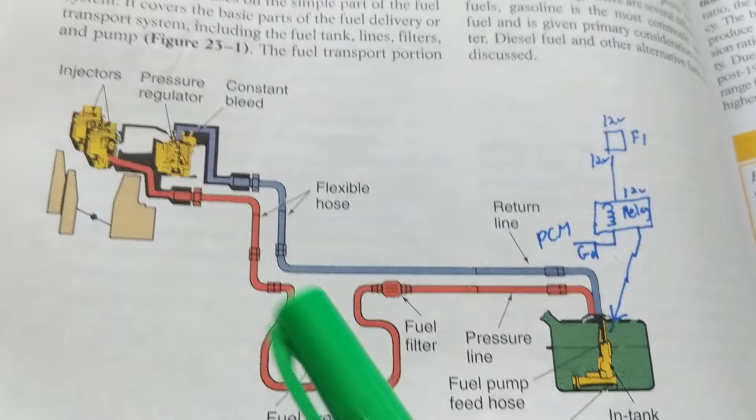We all know from the fuel tank, the fuel is delivered to the components called the fuel injectors, which are all the way in the front of the car. The fuel pump itself is in a fuel tank, as you can see. It's an electric fuel pump. I think this pictorial describes it pretty good. That's why I chose this. So, a couple of components involved, but I wanted to stress the electrical part of it.

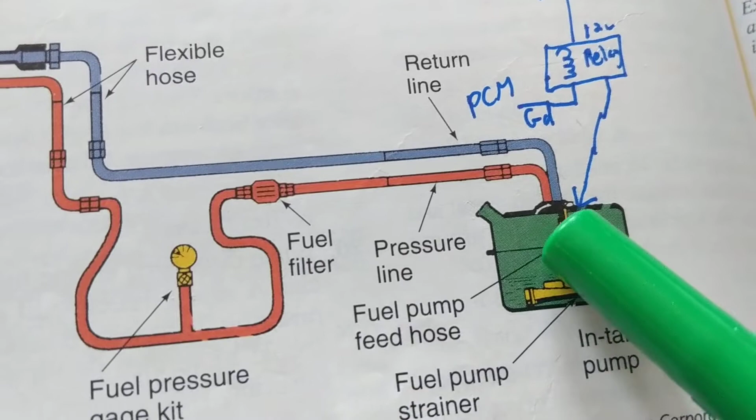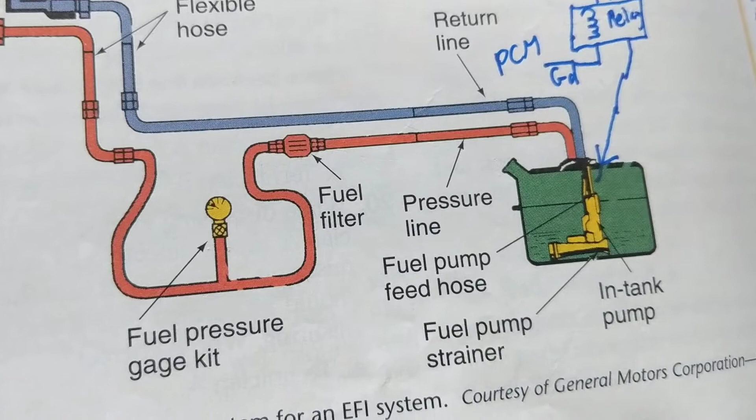Over here, in the tank itself, we have the electrical fuel pump. Now, as a result of that, we have fuel pressure. Fuel will be delivered through something called a fuel filter. Obviously, anything that goes into the engine cannot have any contaminants or dirt. So we have to avoid that. In order to do that, we have a fuel filter, just like you have an air filter. So air and fuel which goes into the engine has to be clean.

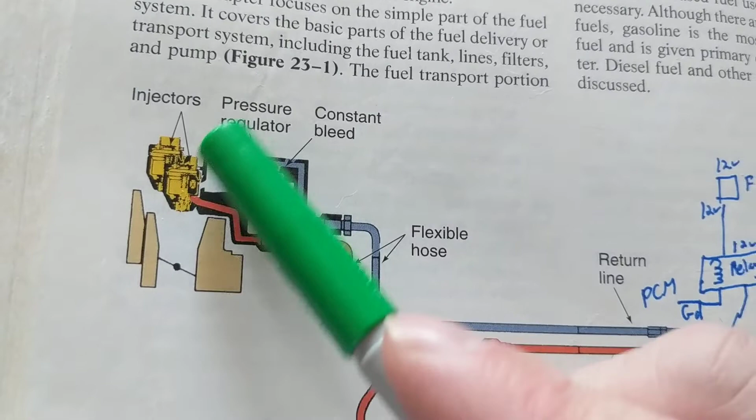Now we have something called a fuel pressure gauge kit. So if you want to measure fuel pressure, you need a gauge to measure it correctly. Remember, this is fuel pressure, not voltage. Then it goes to the proper fuel injectors. If you have a V6 or V8, 8 injectors, 6 injectors, they spray this mist with the proper fuel into each cylinder. Then there's a return line going back to the fuel tank.

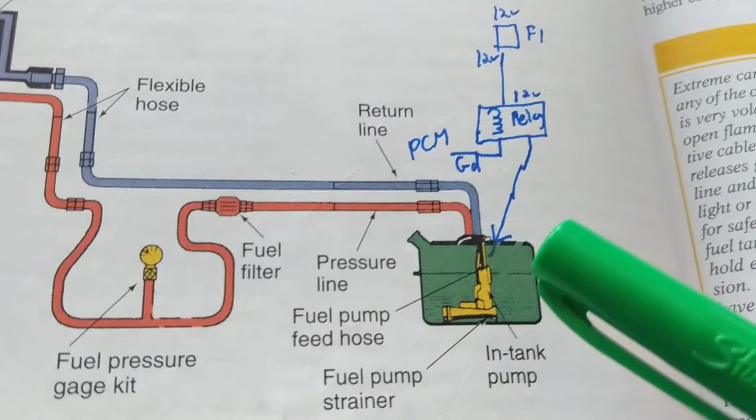So we're going to stress one thing. A couple of things are missing. In another video, I'll stress these other components like the fuel pressure regulator and all these things a little more. But now I want to delve into the electrical part of it so you understand better. Whenever you hear the word electric fan, electric motor, think of one thing: a voltage. It needs a voltage. Electric fuel pump means, as soon as you hear the word electric, it needs a voltage.

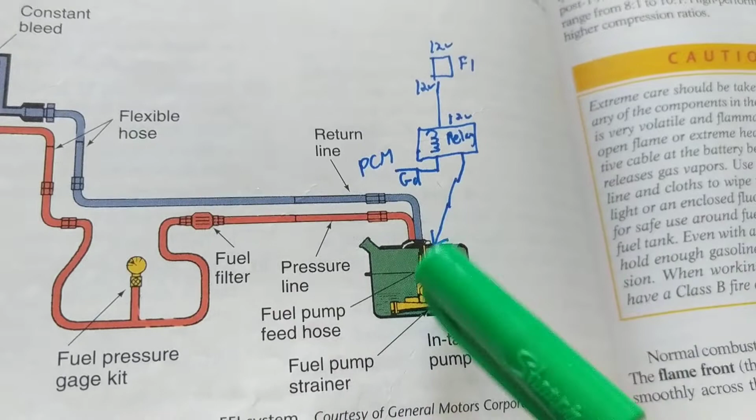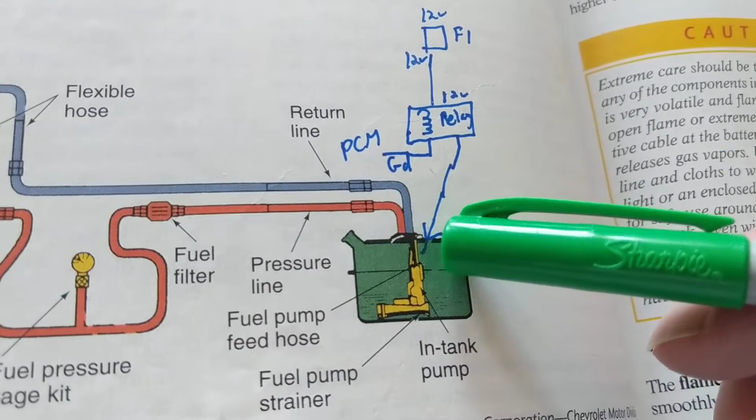What's missing in this diagram, this is just pointing out the actual fuel delivery. Okay? The electric part of it is not here, so I had to draw it in. Now, we need 12 volts to go to the fuel pump. In the olden days, there was a mechanical fuel pump, and the fuel pump was external on the outside. Now, it's in the tank itself, which is a hard place to get to, obviously.

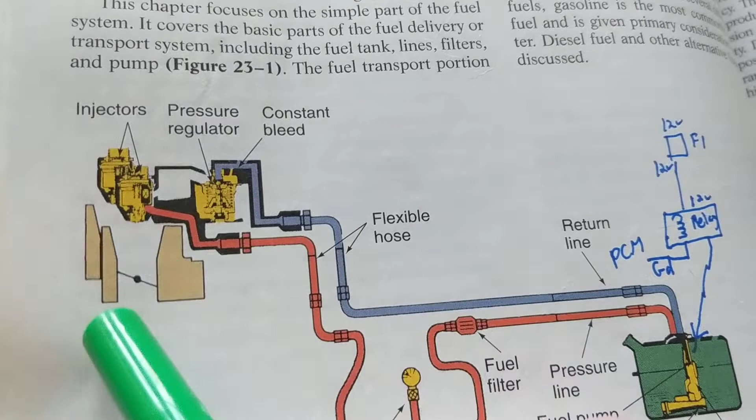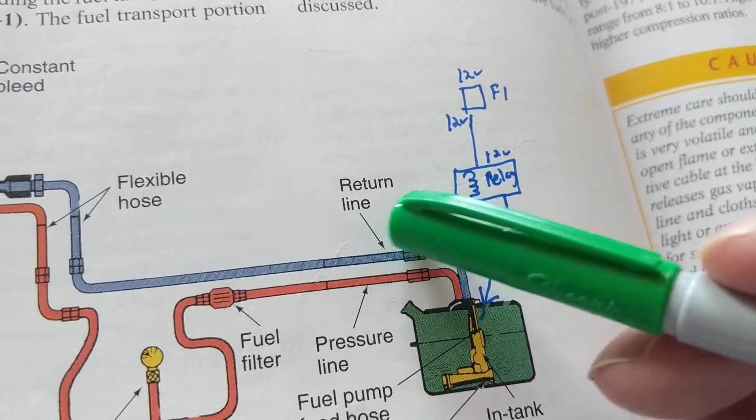So as far as diagnostics, if you have a crank and no start, it's hard to get to this point to diagnose. What you want to do is go to the front. The front, where the fuses and relays are, is the most accessible. That's why in every video I always say try to stay within that area. That doesn't mean that the problem is not the fuel pump itself, but we go to the areas that are the easiest to go to. Now, this fuse, this relay, this computer, which we'll discuss, is in the front, under the hood. But for demonstration purposes, I drew it over here.

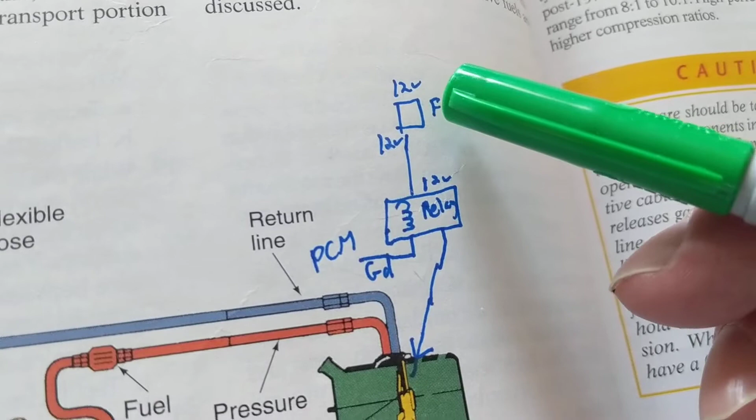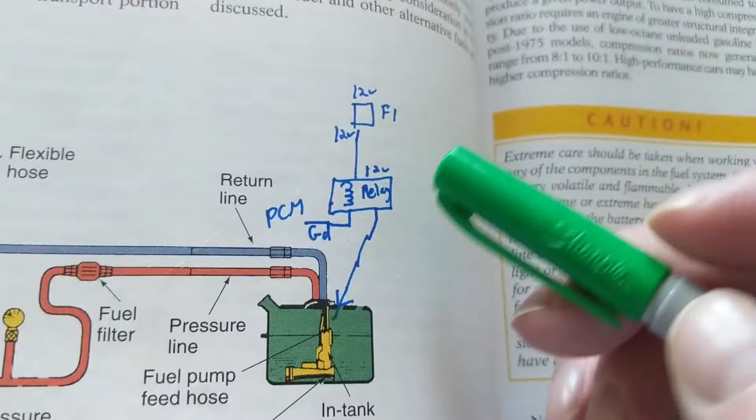Now, as we said, we need 12 volts. We go through a fuse, let's say. One side of the fuse, the fuel pump relay fuse, will be 12 volts. The other one is 12 volts also. Before the relay, we have 12 volts through a wire. Now we have something called the relay. The relay sometimes needs the PCM, which is the main computer, to give the coil side, the control side, a ground.

So one side of the coil has 12 volts, the other side has a ground coming from the PCM when the PCM decides to give it a ground. That will activate the relay. That will give 12 volts on the load side, which I didn't draw, to the electric pump, which we need 12 volts to.

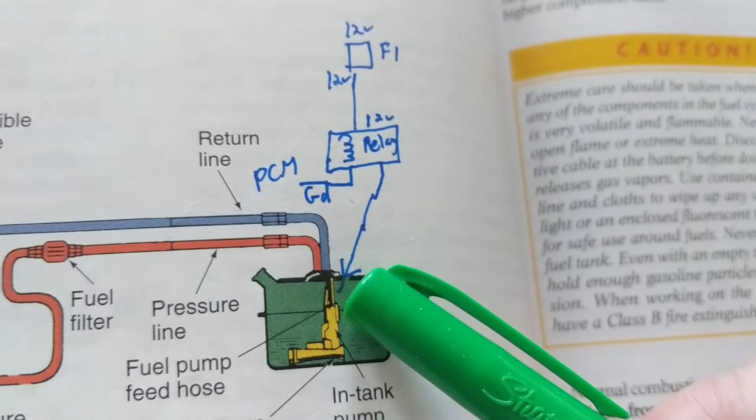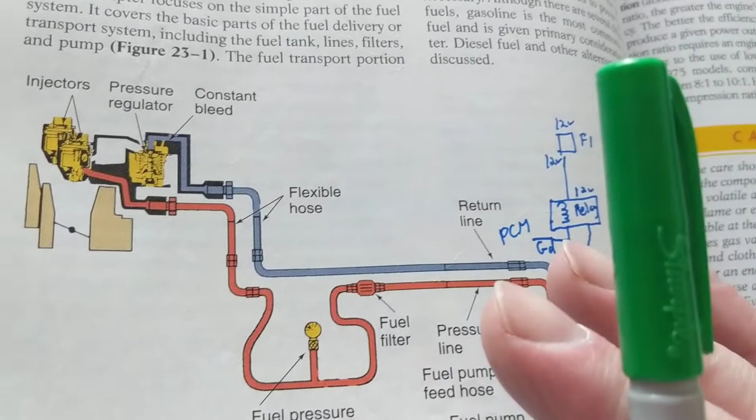Now, there's a problem. Let's say you have a crank and no start. Do you measure fuel pressure with the fuel pressure gauge? I know many people don't have fuel pressure gauges, and number two, even if you have it, where are you going to put it? You may not have a Schrader valve, which is a valve specific to put the fuel pressure gauge. So are you going to measure fuel pressure or voltage? Remember, the car doesn't start. Which comes first? Do I need the voltage to give me the fuel pressure, or do I need the fuel pressure to give me the voltage?

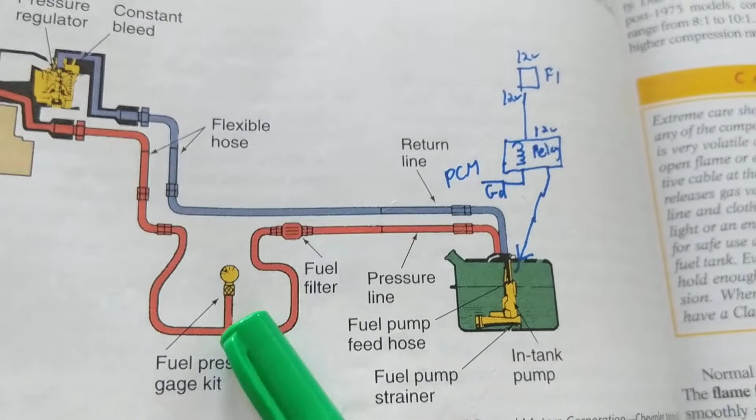So which comes first? So let's say there's a fuel pressure gauge, just like the gauge in your car for the temperature, for fuel, for anything. Okay, that's called a gauge. Now, first of all, how much pressure is needed? Depends on the system, depends on the car, depends on the fuel injection.

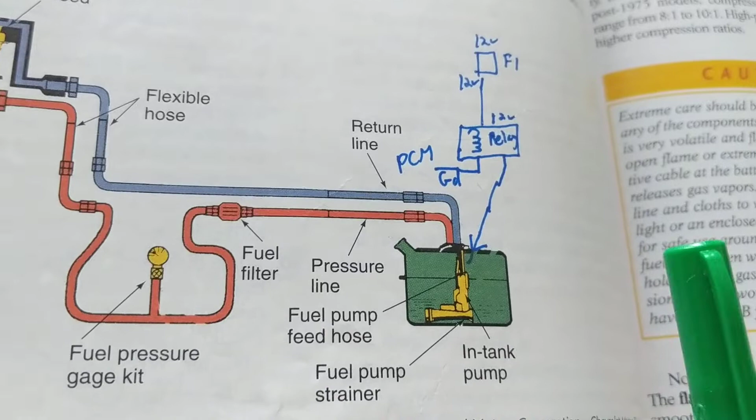Do you need 20 psi? Do you need 30? Do you need 40, 50? 50 psi is a good number. 55 psi is a good number. Some go as high as 60 psi. So, number one. Number two, if you are using a fuel pressure gauge, make sure the pressure stays. It holds pressure. It does not drop from 50 and then go down slowly over a couple of seconds, from 50 to 48, 47, 46. You want it to hold pressure.

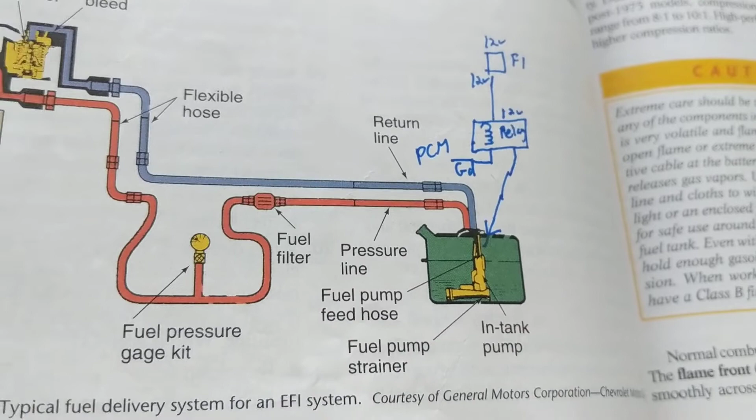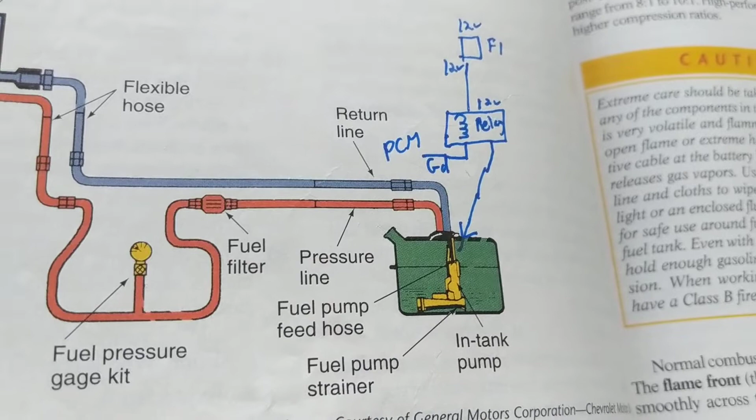What do we mean by that? Let's say you have a tire filled with air. Over time, it loses air. Why? Because there's a leak. Maybe in the valve stem, maybe in the tire itself, on the nail, right? You will lose tire pressure. How do you know? There's two ways of looking at your tire. Visually, or there's a tire pressure monitoring system that tells you that you have low tire pressure. So either visual or electronic.

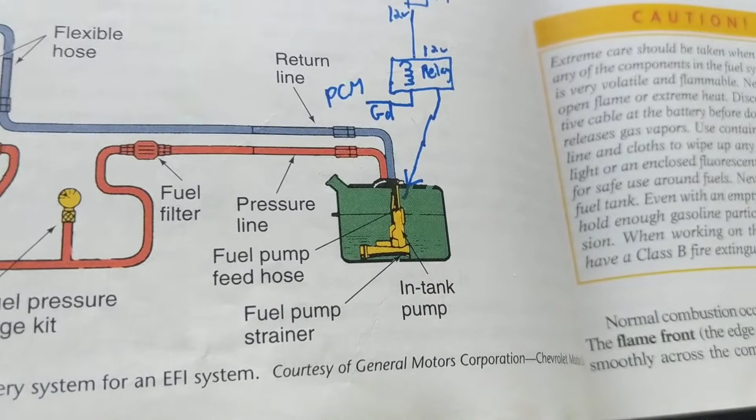If you put air into that tire and you see that it's underinflated and it doesn't take the air that you're putting in, guess what? You know you have a bad leak. Can we see a fuel pump visually? No, that's the problem. We have an electric fuel pump. We can't determine if it's bad visually. That's why the electronics is the challenge of how to diagnose a bad fuel pump. And it's a costly venture, obviously.

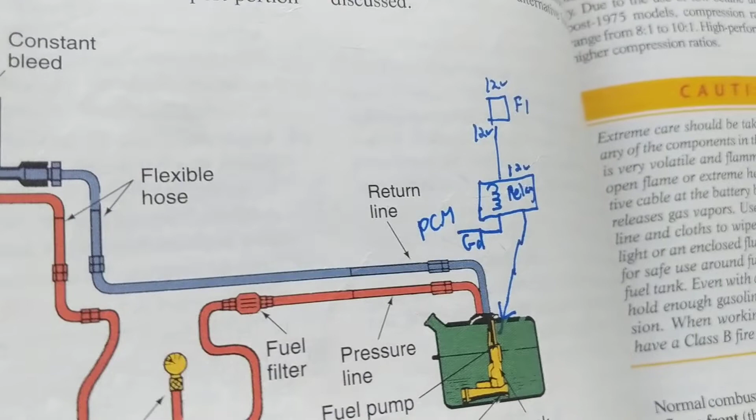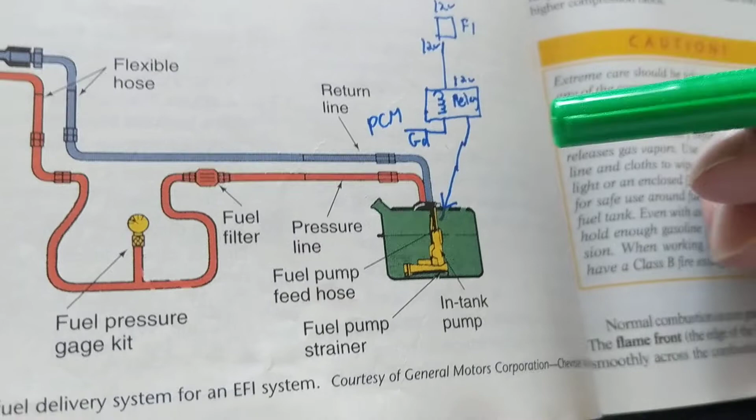You have to go to the fuel tank, which is probably full of fuel when it happens. It is labor and it is parts. If the labor is 120 an hour and it's a 2-hour job, that's $240 just for labor. Forget about the parts. So again, in our example, the tire does not hold pressure because you keep putting air in it and it does not hold air. It's a bad leak, and that was easy to see visually. This is not visual. I cannot go inside the tank and look. So electronically, I have to measure it.

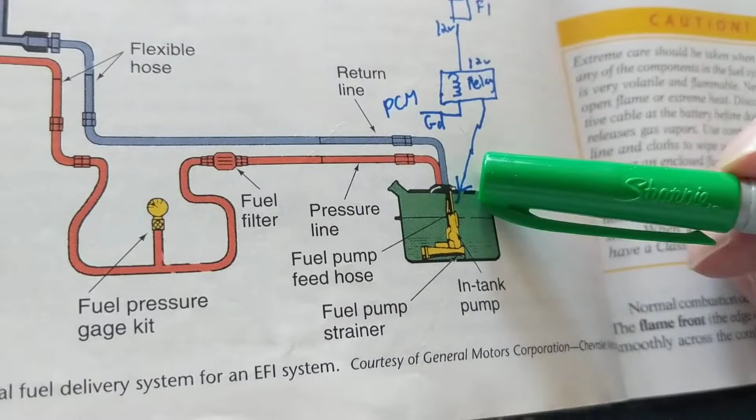Like we said before, do I measure fuel pressure? Do I measure voltage? Let's say the fuel pressure is 0 psi when I put a pressure gauge on. What's my next step? My next step is the voltage. I need 12 volts for this to give me fuel pressure. If I do not have 12 volts, I have no fuel pressure. I cannot deliver the fuel. So which comes first? The voltage comes first. But which do I test first?

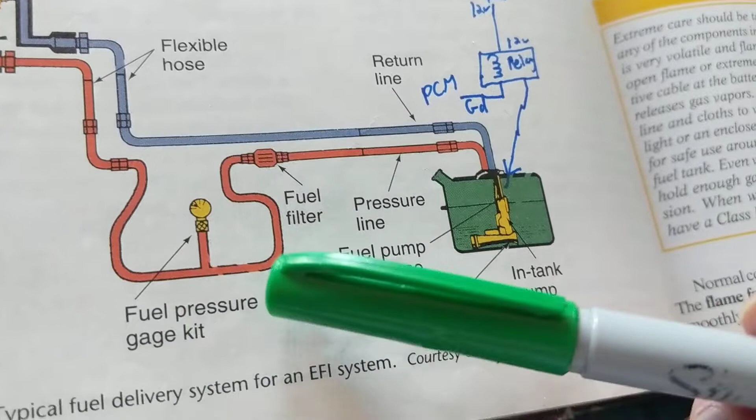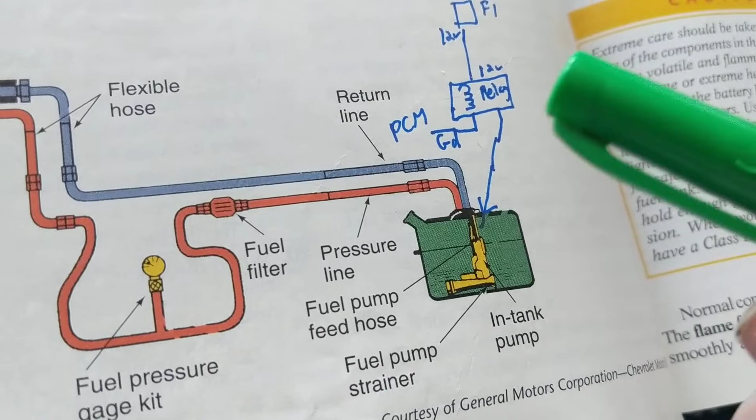If you're able to use a fuel pressure gauge, this is the best test. Make sure you have fuel pressure and make sure you hold fuel pressure, just like the tire example. If you need 32 psi in your tire, make sure it holds 32 psi. Now, what are we left with? The fuse, the relay. One more thing I had to draw in: what activates the relay to give 12 volts to the electric fuel pump? The PCM, the main computer, giving it a ground on this side. We need 12 volts here and ground over here. The PCM gives it a ground. Now we have 12 volts.

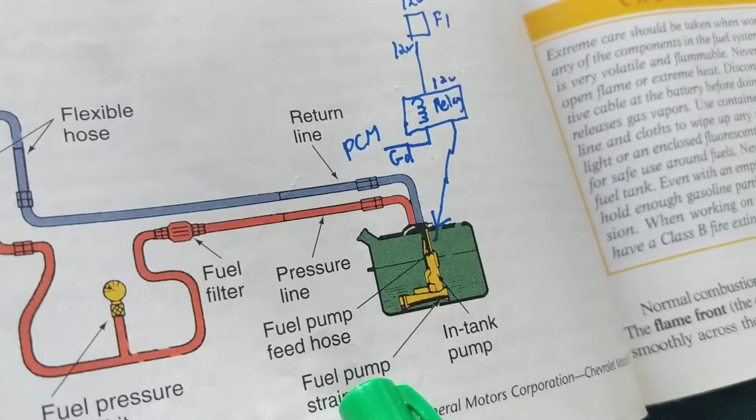Okay, so basically they all work the same way. It doesn't matter if the PCM gives a ground or if it has a physical ground. It doesn't matter if it's Asian cars, domestic cars, European cars. They all have to work the same way. There could be one relay. There could be two relays, like we had in, I believe it was, Hondas. There could be 3 relays. You never know until you look at the wiring diagram.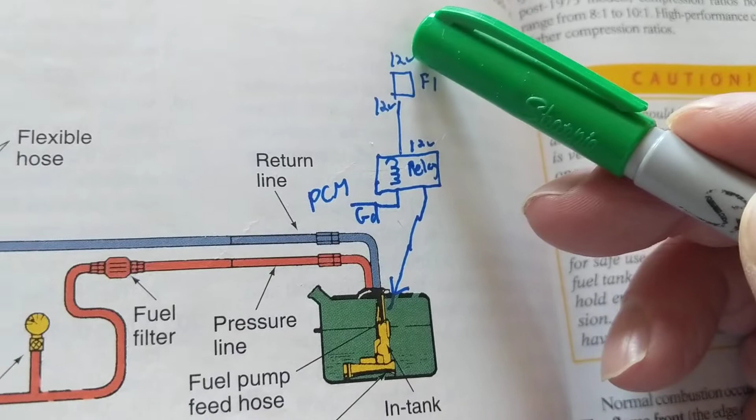Now, diagnosing. I go to the fuse. I know I have a crank and no start, right? I go to the fuse, I measure 12 volts here, and I measure 12 volts over here. Does that mean I will have fuel pressure? Absolutely not.

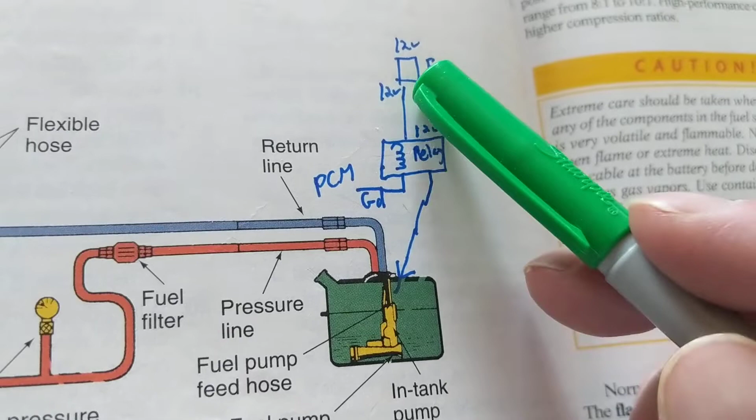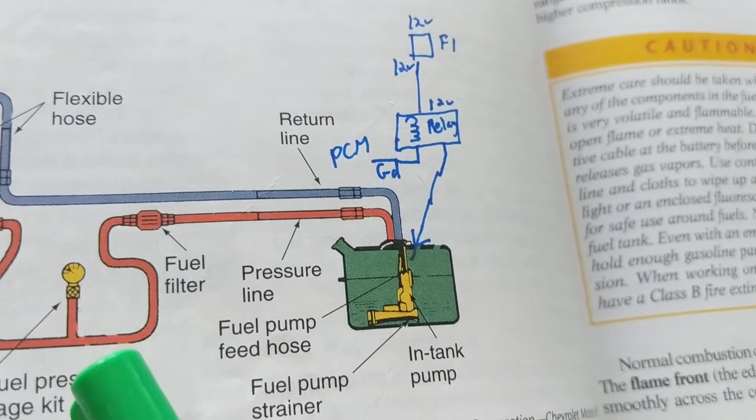Absolutely not. Right? We still have this involved. Okay? Let's say you don't have a fuel pressure gauge. You don't know where to put it, and you don't have it. So we'll start from the voltage, like I just said. I got 12 volts here, 12 volts here. Does that mean that I have fuel pressure? Not necessarily. We're still left with this.

I come to the relay, this side of the relay. I have 12 volts at the relay. Does that mean that I have fuel pressure? Not necessarily. I go to the other side of the relay, not the coil side, the load side. And I measure 12 volts over here. So I say to myself, okay, fuse is good, this wire is good.

What else? The main point to stress. If I have 12 volts coming out of the relay, what does that mean? The PCM gave it a ground. That means the computer is good. That means the coil side, this is the coil side, is also good. Why? Because it's been activated. Because I had 12 volts on the other side. That's a good thing. That shows me at least the computer is working. That shows me the relay is working.

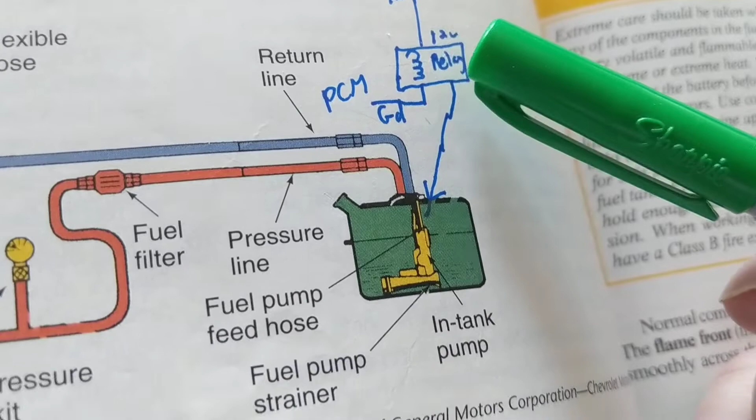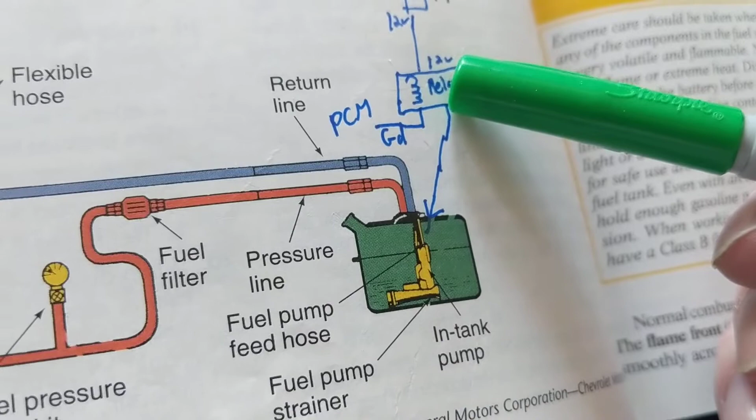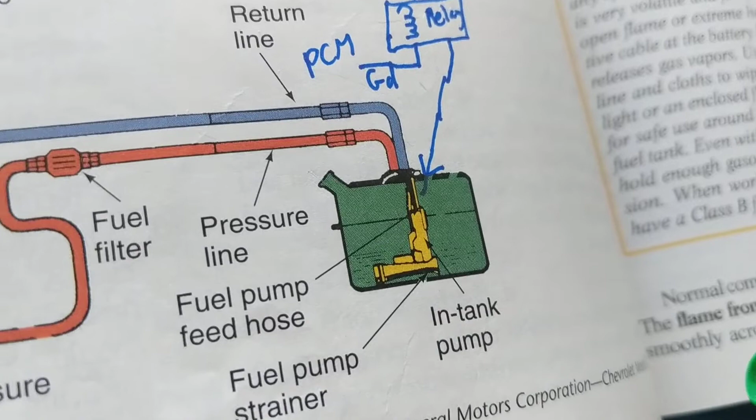Will I have fuel pressure? Not necessarily. And you're going to say, but why don't I have fuel pressure? You just told me if I have 12 volts going here, that's a good sign, right? Let's say you just went to the gas station, went to BP, you filled up your tank with $40 worth of regular, right? Then you crank, the car doesn't start, but I just filled up with gas, right? It doesn't matter if you put in super, premium, 93, 91, regular.

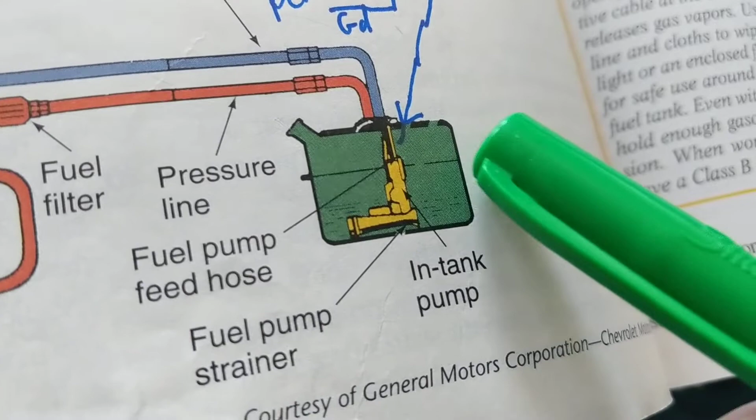It doesn't matter. The amount of gas that you have in the tank, just because you filled it up, does not mean necessarily that the fuel pump will start. You need 12 volts and you need pressure. The fact that you just filled it up is nice. BP will tell you you're a good customer. Thank you for your service. But your car won't start. But if you are empty, obviously, then it will have an impact. So, 12 volts over here. I had 12 volts at the relay.

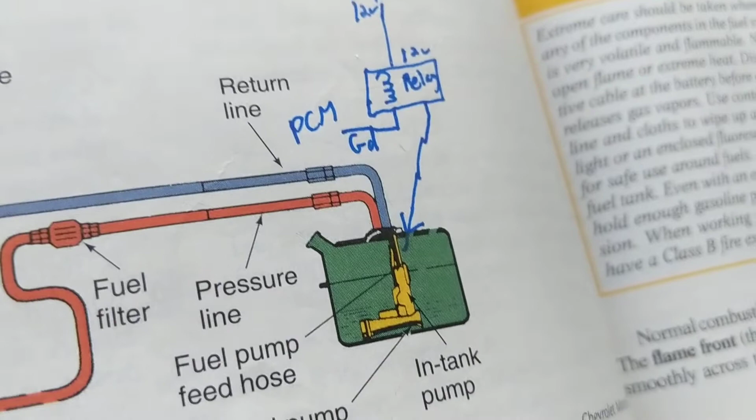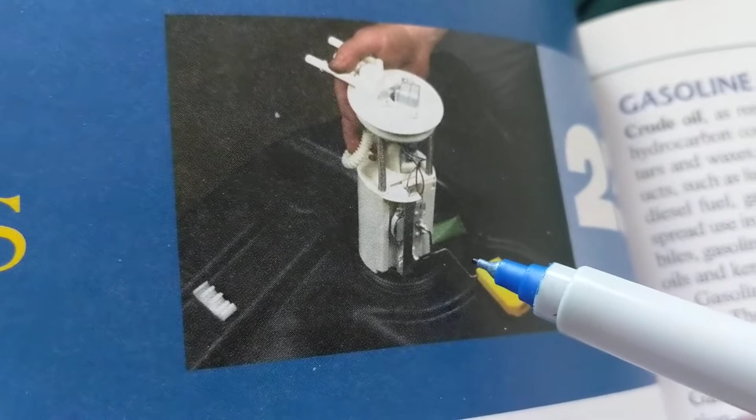My point over here is, where do I have access to? Up to here. Easy to have access. Why? Because all this is in the front. Now comes the hard part. How do you get to the fuel tank, and how do you take it out? This is a picture of the fuel pump itself, which is located in the fuel tank. As you can see, you have to take it out of the fuel tank, and if there's a lot of gas in it, you need two people to take out the straps and all that. It's not that easy. So therefore, that's your last resort.

So we chose to go over here because everything is easy under the hood. That's why in every video I always stress, go to the fuse, go to the relay. If I have 12 volts over here, that's a good sign. Like we just said, that means the computer gave this a ground. But there is a wire that goes from here all the way; there's a wire missing in this pictorial. The wiring has to go all the way from here to the trunk.

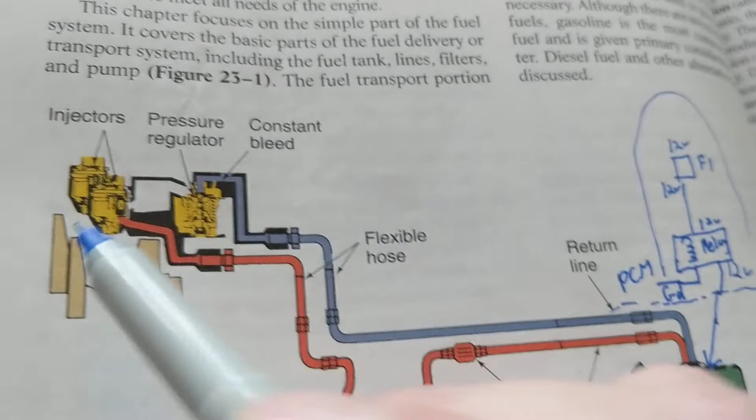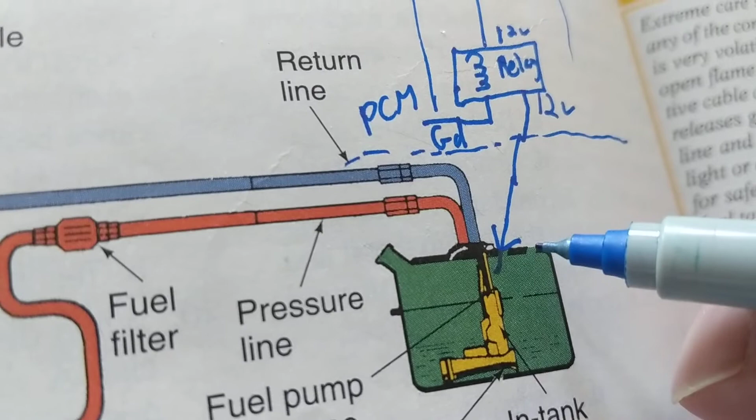What happens if this wire, which is represented from here to here, is broken or corroded? So I could have 12 volts at the relay, and 0 volts over here. You don't know until you go to the actual connector of the fuel pump. That's a big problem, to go all the way from the hood to here. Remember, it's a long way, right? So that's why they're called harness wiring.

So from the PCM, which is located under the hood, it goes to the relay. The relay box is in the fuse panel, obviously. And the wiring under the relay, which you can't see, will go to here. Now, the problem exists. If I have 12 volts over here, do I have fuel pressure on my gauge if I put a fuel pressure gauge on? Absolutely not. Doesn't mean anything. What if I get to this point and I measure 12 volts at the fuel pump connector? Does that mean that I have fuel pressure?

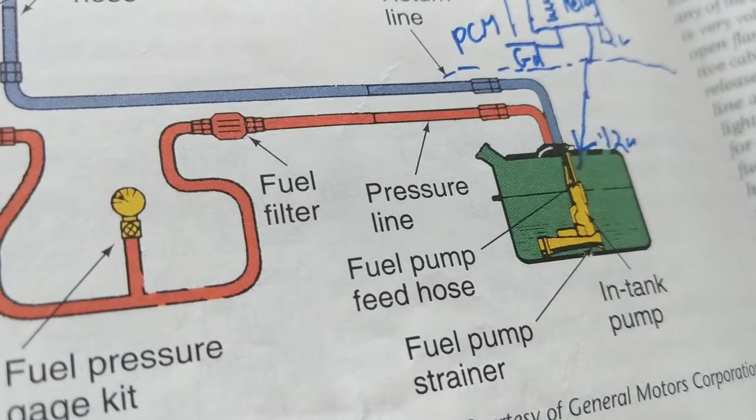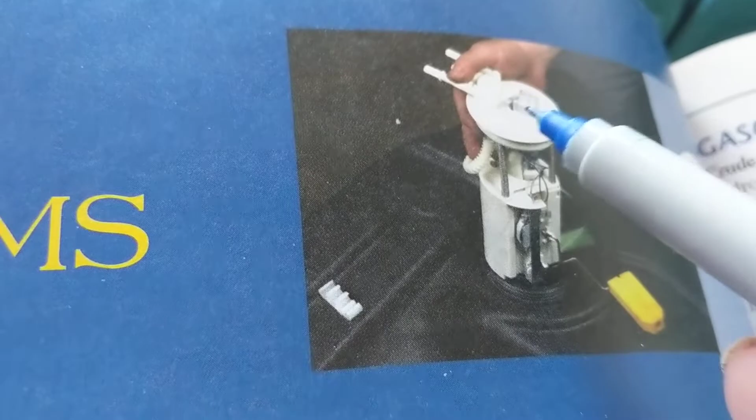Absolutely not. Why? Because maybe the fuel pump is bad. When you have 12 volts at the fuel pump, if you're able to get to this fuel pump to measure the connector, right? And I'm at 12 volts, guess what? The fuel pump is a problem. Because I went as far as I can.

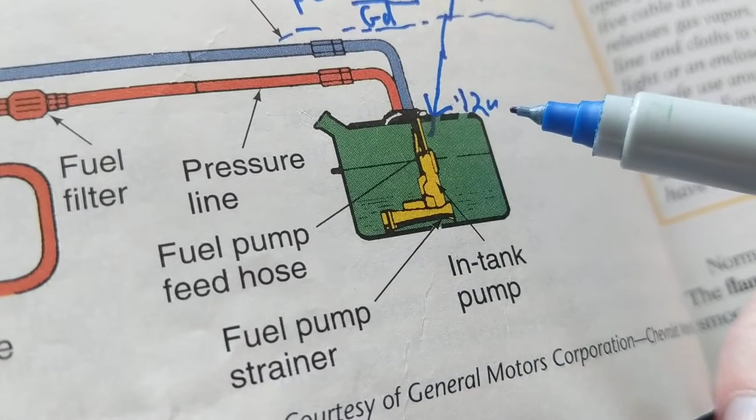It delivered 12 volts to the fuel pump, which is what it's supposed to do, right? That means the relay is working. That means the fuse is good. That means the PCM gave it a ground. That means this wire from here to here is good, and everything up to this point is good. What am I left with? The fuel pump itself. And how expensive is that if you go to the dealer, right? There are many cheaper ones online, obviously.

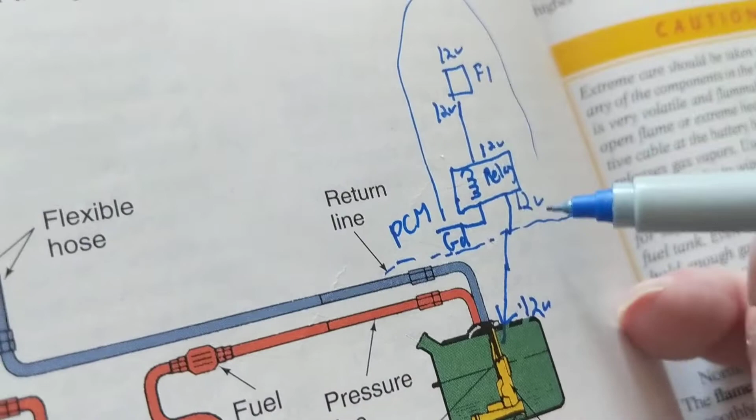But just because you have 12 volts over here doesn't mean you have fuel pressure. If the fuel pump is good, then you'll have fuel pressure with 12 volts. But why I drew a line to here is to isolate, to divide the troubleshooting. These are easy access, which are under the hood. But this, after that, is tough access. That's the last place, the last resort that you want to get to. Now, I hope you understand that.

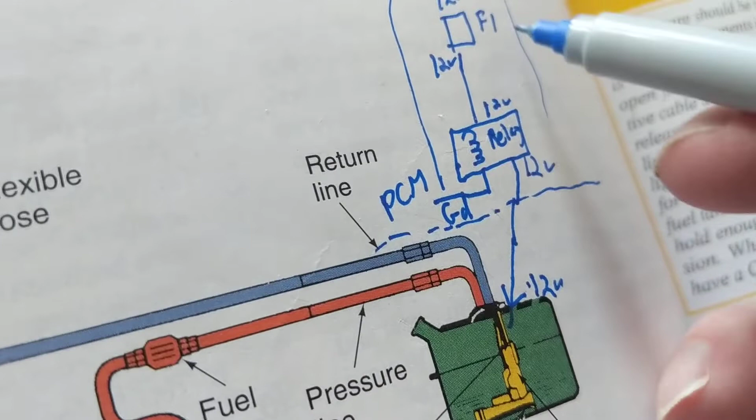So first you have the 12 volts. That activates the fuel pump. Then you have fuel pressure in the line. Again, if you have 12 volts over here, it could be a problem with the line, with the fuel filter, with the regulator, with the check valve. Anything is possible. But we're doing our best just to make sure that we have 12 volts.

Now, can you listen to it? Sometimes you can listen to it. Let's say I don't have a fuel pressure gauge and I just cycle the key. Like for GMs, you have to cycle it about 2 or 3 times back and forth to the run position to build up the fuel pressure. Sometimes you have to cycle it a couple of times.

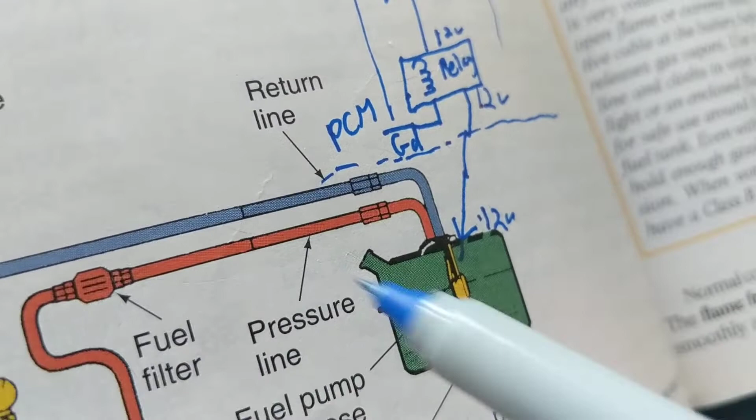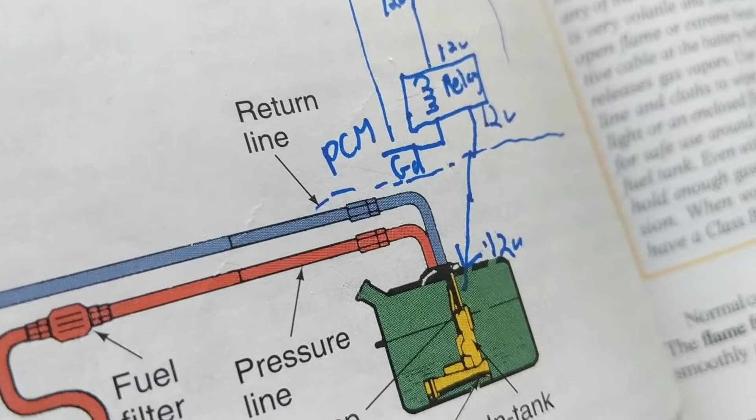So therefore, the fuel pressure line over here, if we have 12 volts, we'll have fuel pressure. If we don't have 12 volts, forget about it. It's not going to be activated. This is the main line. That's why I stressed 17 minutes ago, I started with the statement: electric fuel pump. What does the word electric mean? It means it needs a voltage. We got to this point. Here's the voltage that it needs.

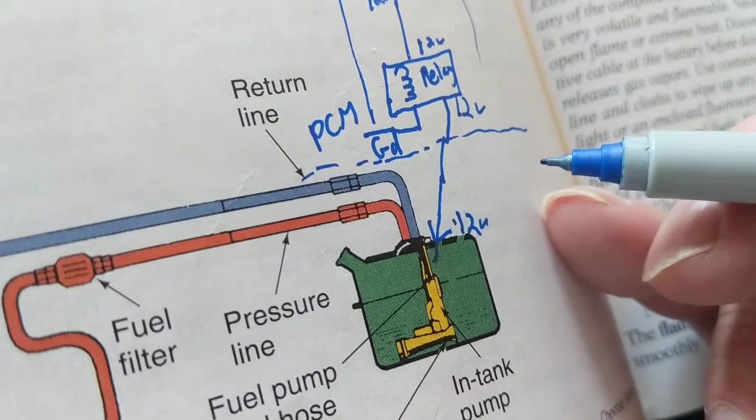Here's the voltage. Okay? Now, I received an email from someone about a video I made about a fuel pump. As you know, I made quite a few about fuel pumps, how to measure the relay in the fuse panel itself, not taking it out; I don't believe in taking out the relays. He said he watched my video about the fuel pump relay circuit, and he understands some diagrams, but it was a little complicated. He says it was on a high level.

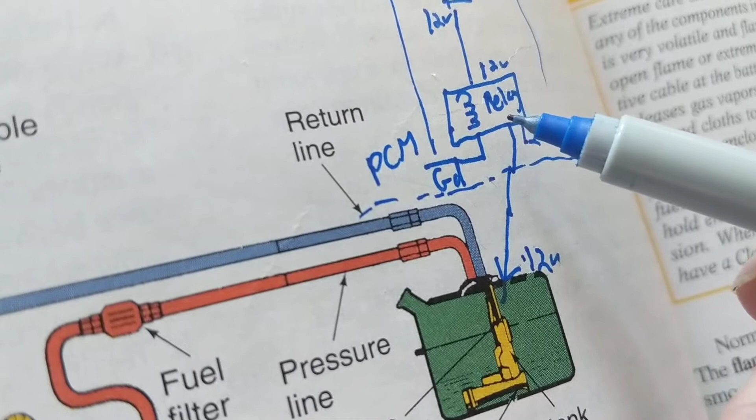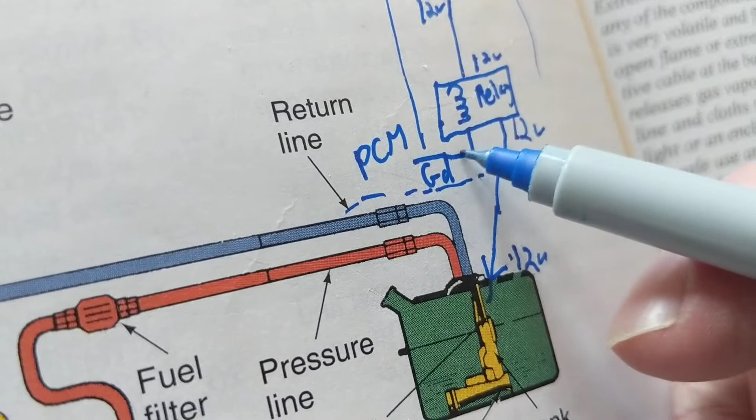So he told me he had a problem after that. He went to the dealership. He thought he had a problem with the fuel pump. When the dealership diagnosed it, they found it wasn't the fuel pump. It was a wire going from the PCM to the relay. Somewhat like this. I'm not sure of the actual schematic, but from that you can infer that a wire goes from the relay, which we drew over here, a ground, to the PCM. And he was happy about that, obviously. Much cheaper than changing a whole fuel pump.

After that, he went back and looked at my video, and said, now I understand what you were talking about. I learned the hard way, but I understand what you were trying to point out. You cannot assume all the time that it's a fuel pump, starter motor, battery. Like I tell people all the time, even the mechanics that I've worked with for 40 years are working with the basics of a car from 25 years ago.

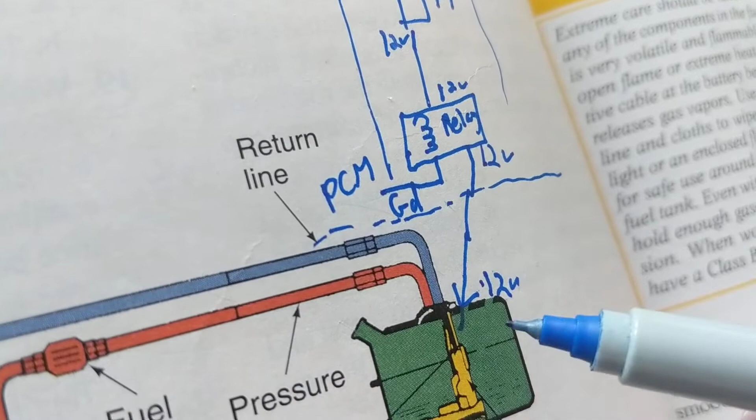It's not like that anymore. You don't have just starter motors. You just don't have ignition switches. In Acuras, you don't see ignition switches. You have modules now. You have computers, a BCM controlling a PCM.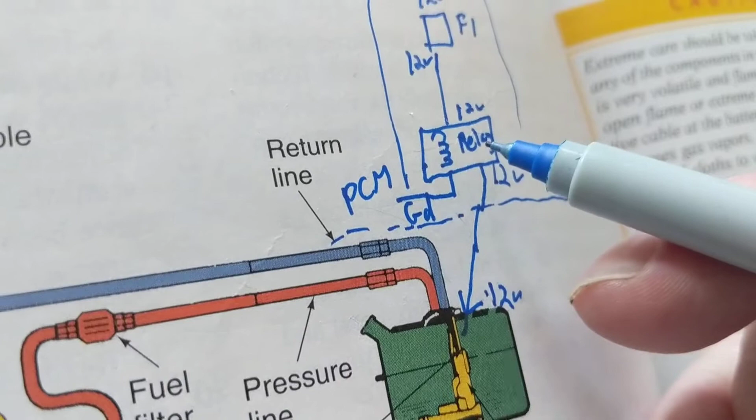You have sensors all over. You have airbags. You have radar units, radar detector units. Those go bad. You cannot always say it's a starter motor, it's a fuel pump. And a short story, and I'll finish.

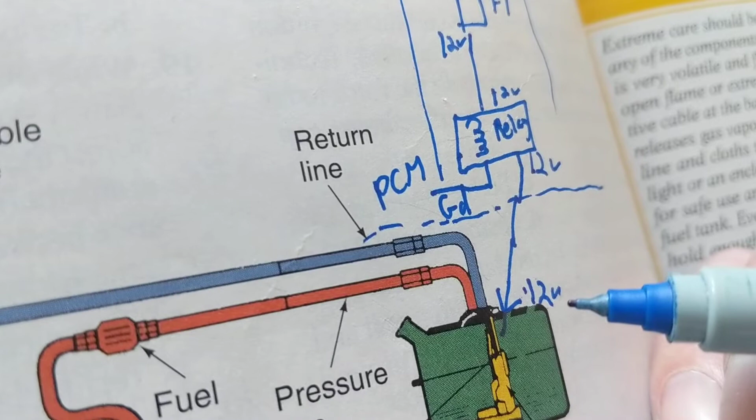Like a person emailed me, and he said, I changed the starter motor, and it didn't do it. What do you think the problem is? And you know how many of those I get? So many I get of those. I changed the fuel pump, it didn't do it. I changed the starter, I changed the battery, didn't. And I say, what's your data? What is your data for diagnosing that it was that starter motor in the first place?

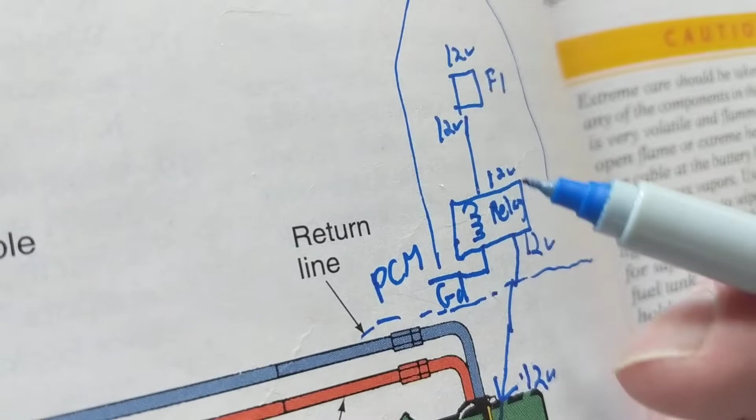Well, he said, I went to the fuse. The fuse was good. If the fuse was good, I was left with the starter motor. Had to be the starter motor. Obviously, it wasn't the starter motor. That's a waste of hard-earned money. Why? Because there's modules, PCMs, BCMs, like I just said. There is harness wiring in today's vehicles. It is much more advanced. That's why I stress the point.

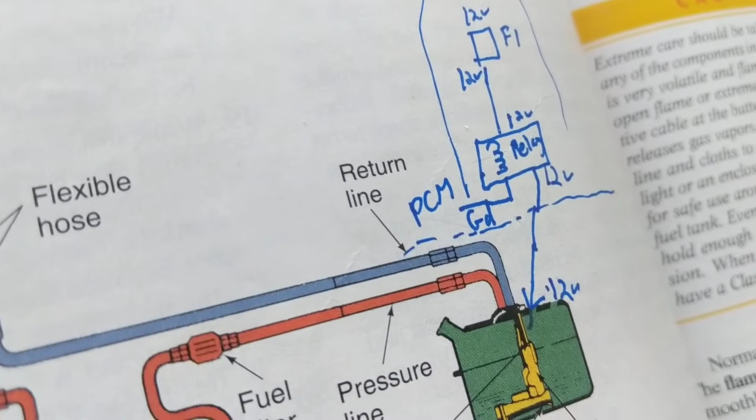Sometimes people say that it's a little complicated what I'm teaching, but electronics is complicated. What makes it hard is this is not visual. This is not brakes. Like me and Scanner Danner, how we teach it, and he is a legend. He is just the best out there, Scanner Danner. But the way you teach electronics is not visual.

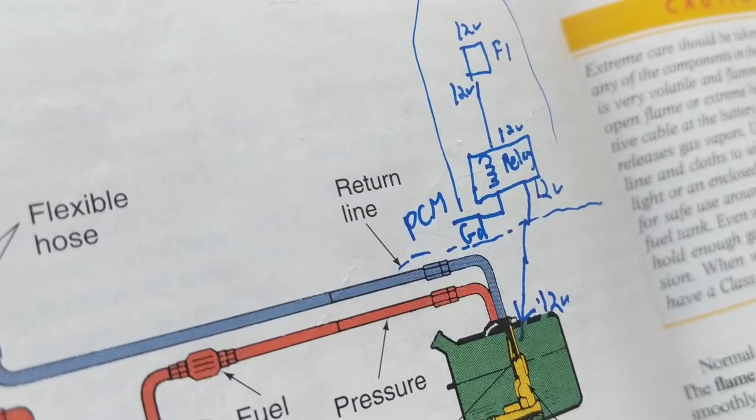Bad brakes, rotors, CV joints are visual. You can see a leak. You can see bad brakes. You can see a fuel line that's leaking. You can see all those things. They're visual. They're mechanical. You cannot see current flow. You cannot hear current flow. That's what makes it hard for me.

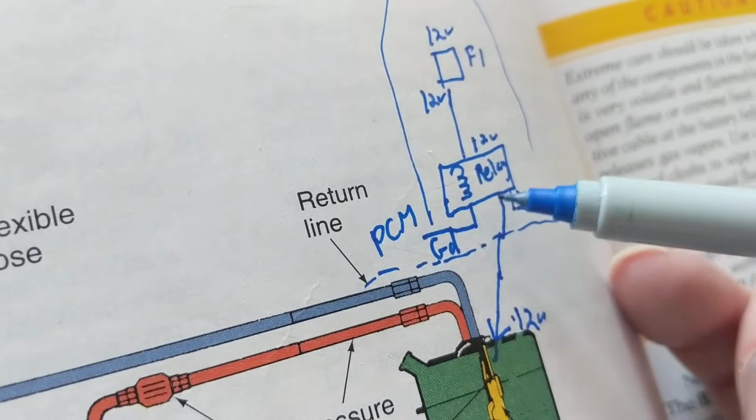Scanner Danner does a good job trying to convey how do you teach people something that they cannot see, and that's electronics. The only way to see it is by a voltmeter, by diagnostic equipment. That's the only proper way you can diagnose electronics. You cannot see a bad relay. I cannot see a bad fuse. You can look at it and say, okay, it looks bad. I don't rely on that. I take an ohmmeter and I measure the fuse. I don't rely on if it's melted or not melted. I don't rely on hearing the relay.

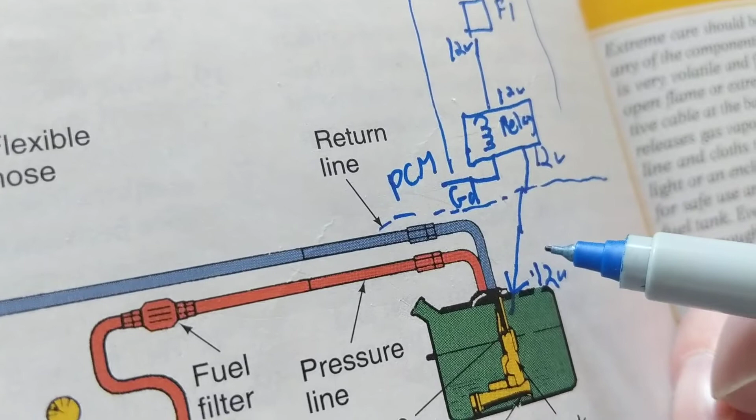And that brings me to the point: sometimes when you turn the key on, you hear the fuel pump being activated. You hear the 12 volts going to it. That's a good way of doing it, but that's not the best way. That's not the recommended way.

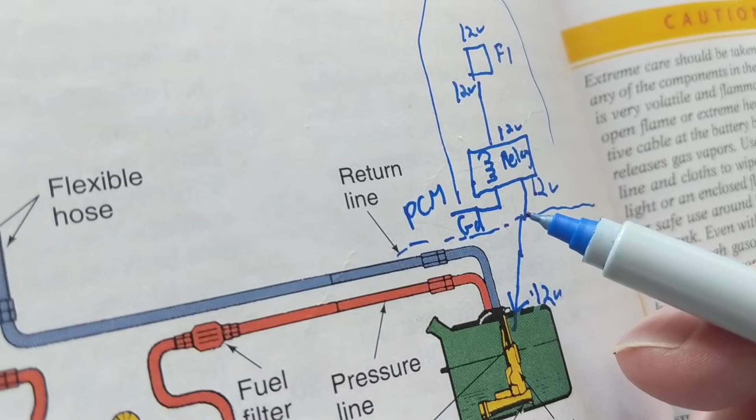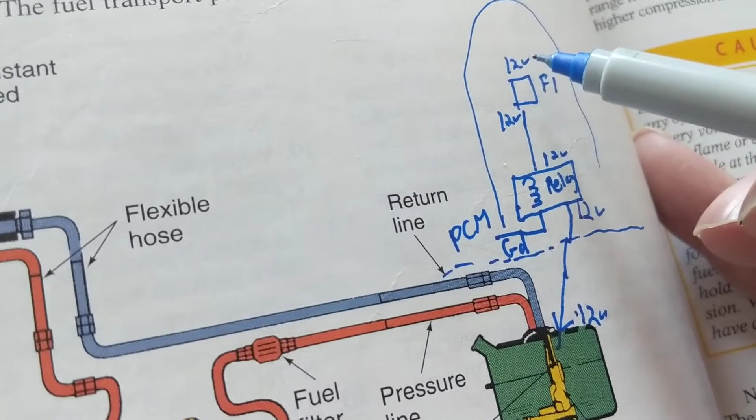So, as we said before, it is a little complicated, but electronics is complicated because the industry is making automobiles more complicated. So therefore, we have to try to teach electronics, not electrical like 25 years ago. This is electronics, this is PCMs. We have to try to teach it the best we can. So sometimes for beginners, it'll be a little rough, but that's why I say go first to the other schematic. That's why I took a pictorial, drew it as easy as I can. You don't see schematics here. It's just a pure diagram.

But remember, if I have fuel pressure, that means I have 12 volts over here. This was activated. Is it correct fuel pressure? Is it 50? Is it 20? That's a different story. Am I holding the fuel pressure? That's a different story. But as far as the electric part of it, is it done correctly if I have fuel pressure? Yes, because I have 12 volts. If I don't have 12 volts, 0 PSI.

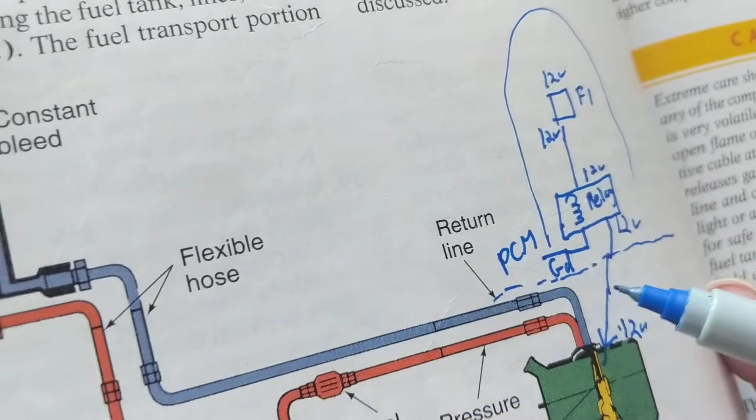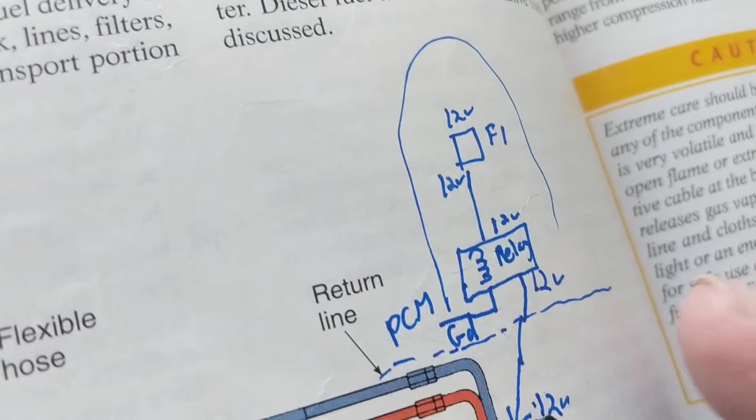So hopefully this made it a little simpler. Like I said, I'll go over the other things in different videos so you understand much better what these are. But I just wanted to give you a brief summary of the difference between fuel pressure and voltage. First comes the voltage, turning this on, then as a result of that, you'll have fuel pressure.